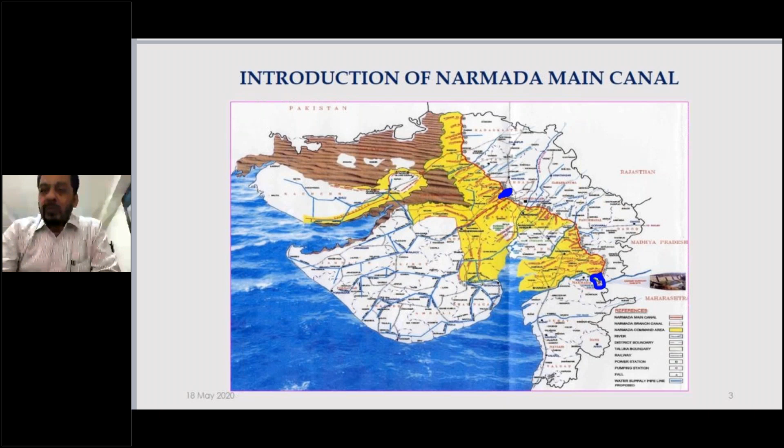Today's case study is at around 70 kilometers chainage of the Narmada main canal, located somewhere here. Looking at the characteristics and salient features, 1133 cubic meters per second discharge is the main point, the off-taking point of the Narmada main canal, which is too big. 1133 cubic meters per second means it is bigger than even a river.

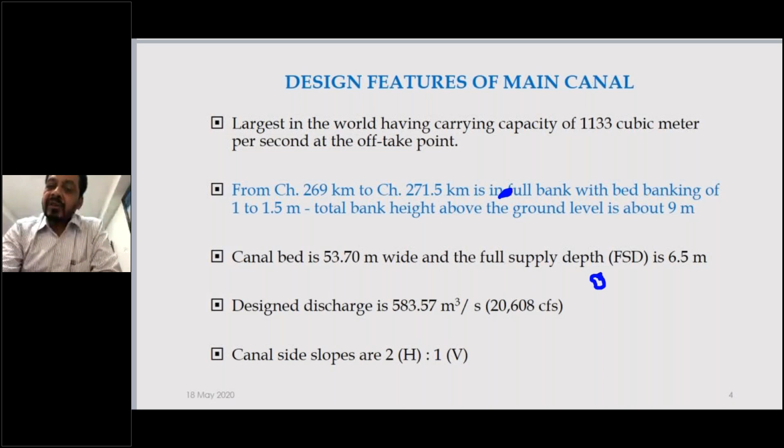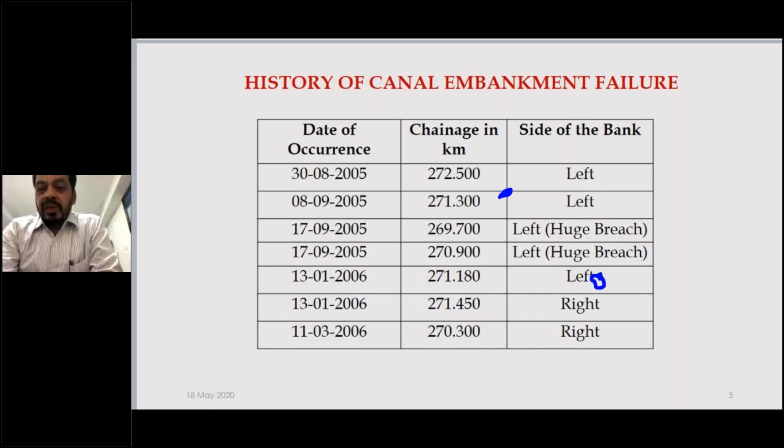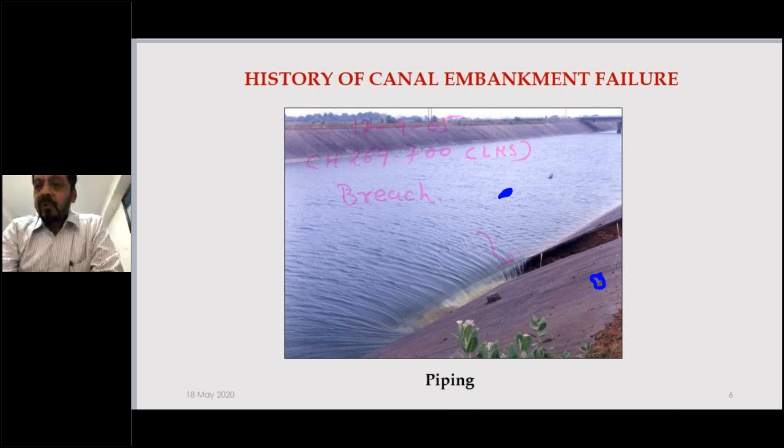What you can see here is a big piping in the left bank of the canal. This piping was 1.5 meters in diameter, just imagine - 9 meters was the total height of the embankment, and 1.5 meters was the size of the piping. You can see in these two photographs the distress this canal caused to surrounding villages. They were all very badly inundated.

This is a photograph of the earthen section of the canal, a far-off view. The section was cut, just like cutting the back of an ice cream, to show how the canal was looking. This photograph shows the signs of distress - a continuous shear failure line here, and here are the structure failures.

With this incomplete line, the shear resistance is too low - that's why this is possible. But you also see a vertical rupture in the concrete lining. Why did it happen? Because some portion subsided and some portion did not subside as much - this is differential subsidence causing this kind of vertical crack. The size of this crack was so big because the subsidence was also so large. This was the failure, as seen in this photograph.

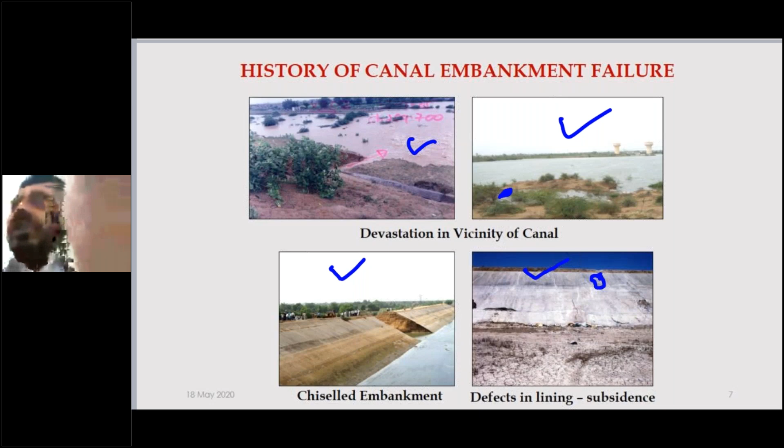So what you see here is a very close view of the chiseled section of the main canal. It is 9 meters tall. You can visibly see 3 flaws in the construction. Flaw number 1 is the stratified section of the entire embankment - some portion is dark and some portion is light. The thin dark portion represents a compacted layer, and the light thick layer represents an uncompacted or semi-compacted portion.

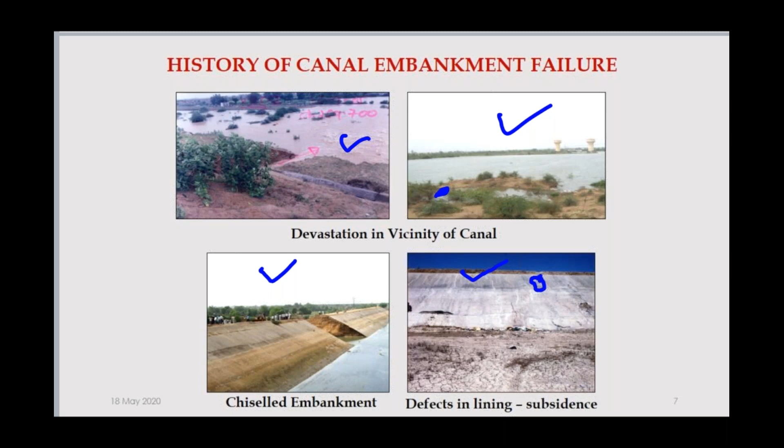Normally we have to construct any canal embankment in a very systematic manner. We prefer to spread only a 23 centimeter thick soil layer uncompacted, then water it, then roll it down to be compacted, going layer by layer. Instead, here there were thick soil layers spread 1.25 to 1.5 meters thick, and then they were watered and rolled. That's why you see the thin line of compacted portion, and the thick line beneath it is the uncompacted or semi-compacted portion.

So that is flaw number one. Flaw number two: actually in big embankments like these, we have to design like an earthen dam. So there would be an impervious core, chimney filter, horizontal filter - every kind of pore pressure releasing mechanism must be there inside. But here it was nowhere. That is flaw number two.

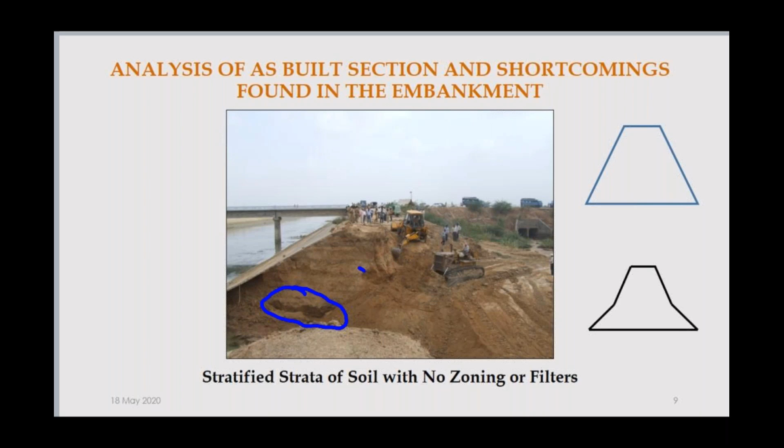And flaw number three, what you can see here, is piping. This piping occurred before the failure, and you can see it's a through piping. And the size of the pipe is also too big. So these are the three failures that were noticeable when we inspected the site soon after the breach occurred.

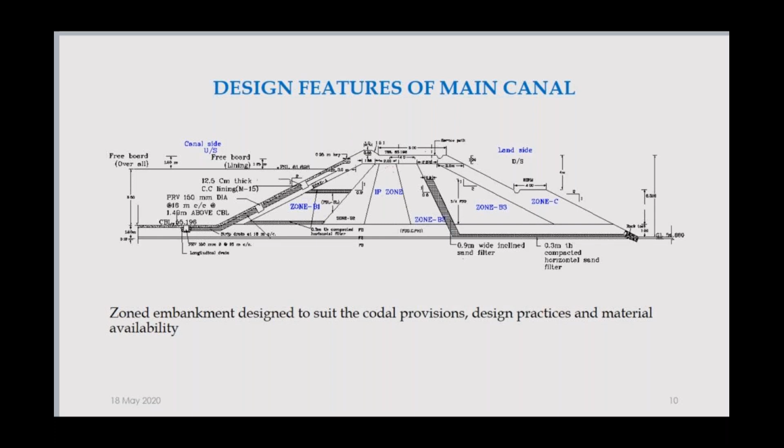So the design section, if you see, is having all the features that I narrated before. Impervious core is also there, then chimney filter, horizontal filter - all kinds of pore pressure releasing mechanisms are there, so that the phreatic line could be within the base width of the canal section. But actually it was not constructed like that.

Now I'm not taking you to the dismal part of the inquiry. Only technical aspects are being focused over here, because our objective is to learn as to how the thing should be better. Now, the question was of analysis of the as-built section - whether it is technically possible to be made feasible to stand for a long time. That was the main question.

So the slip circle modeling that we engineers normally use for embankment stability was not applicable here. Why? Because the fundamental assumption in the slip circle method is that the section should be either homogeneous or properly zoned, so that the properties can be attributed accordingly in the slip circle modeling. But here, because it was stratified, and irregularly stratified, the as-built section could not be properly modeled with the slip circle model. So that was issue number one.

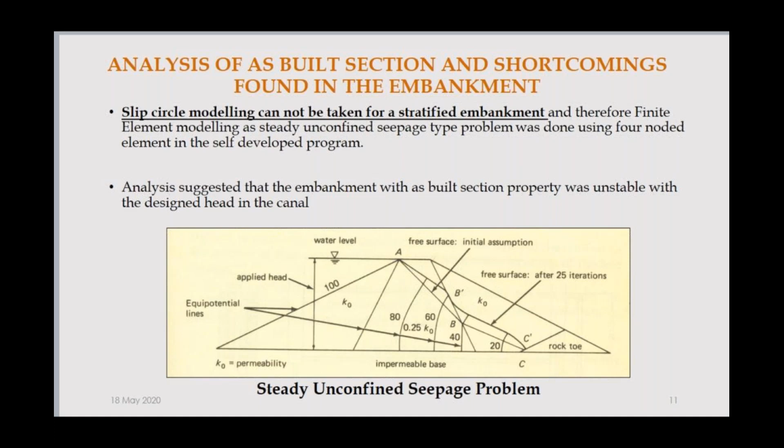But one thing was very clear - that it was actually a steady state seepage problem, and that's why we modeled it like this. In the finite element analysis, K1 represents properly densed or compacted layer, and K2 represents poorly compacted soil layer. That is how we concluded that the phreatic line could not be limited within the base width of the embankment, and it was passing through. Because it was passing through, piping used to take place so frequently. That was our conclusion in brief.

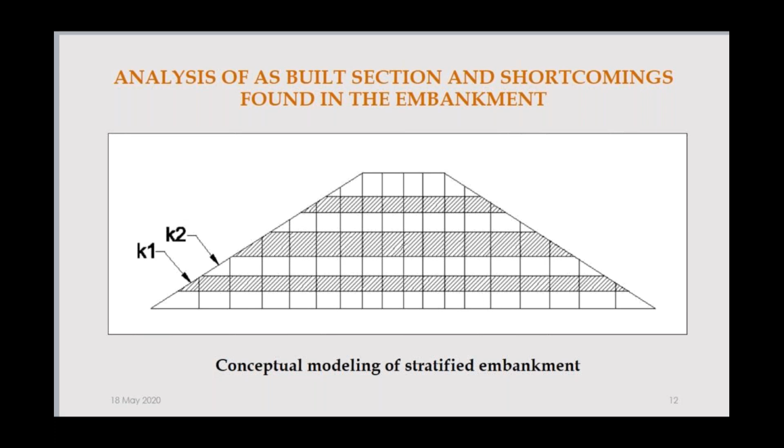Now I am coming to the issues in the restoration of this canal section. This is the main canal of the Sardar Sarovar project, and so many villages and towns are dependent on it for domestic water supply. In order to provide this, the main canal directly supplies the big sumps at town or village cluster level, and only 10 days of standby buffer stock is available for all these towns and villages. So within 10 days, we had to refunctionalize the canal.

That was a big challenge before us - too short a time. Rainfall had already occurred because it was the June end, so all the borrow areas were containing so much water that we could not properly bring soil of the right quality to restore the canal section. Whatever soil was available was predominantly sand with some small quantity of clay inside, so the soil quality available was extremely poor.

So the zonation and the filter material and everything could not be provided because of this non-availability of appropriate material. Another issue was that the length of restoration was too small. The breach was 35 meters, so maximum you can cut both sides, say 15 or 20 meters, and you can have hardly 70 to 80 meters long canal embankment to be restored.

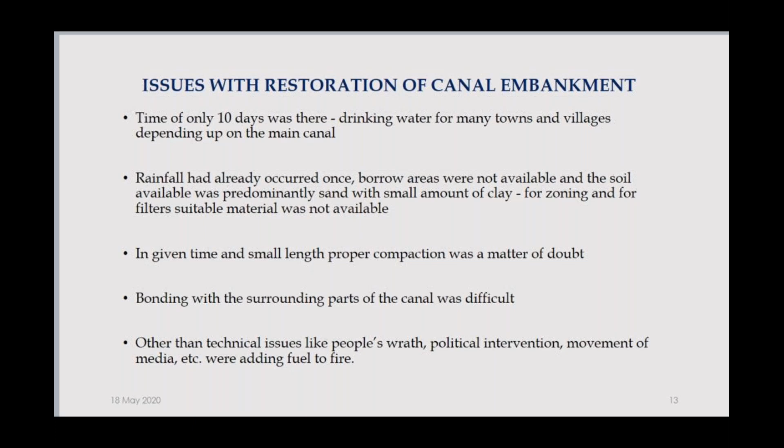That was my first experience. I was not knowing it was going to be a seminal work for my life. But in this first experience, I simply had to depend on the books that I had. There was no IS code shedding any light on this kind of solution.

So I depended on the books only. I made the analysis and contacted all the geosynthetic manufacturers. One had a warehouse in Ahmedabad, 70 kilometers away from this site, and he gave me the material property. It was very cheap on the site, and this material's properties I have listed over here on the screen.

As such, this material was not truly ideal for this kind of solution, but it was still acceptable because of two crucial properties. One is the elongation - just 15% elongation. It was non-woven polypropylene, 15% elongation at the highest tensile strength, which is a very good property that way, meaning my restored portion would not undergo too much deformation. That was my consideration at that point of time.

Number two, the flow rate - you see here it is 260 liters per minute per meter square. These two properties were very much enticing to me, and that's why I said yes, if this material is readily available to me, I will take it instantaneously.

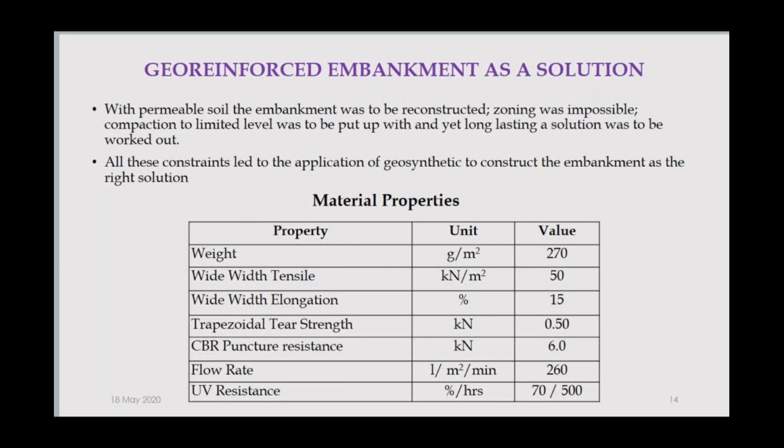But basically my philosophy was that the entire embankment was not geo-reinforced - only a part of it was geo-reinforced, and that was only the outer side. This outer side would be acting as a retaining wall, while the water side would simply be resting on this. So this is how this design philosophy works, and accordingly I designed the section.

Now I'm taking you to the design philosophy as to how the reinforced earth actually works. I'm taking you to the fundamentals because you are all engineers and can appreciate how the reinforced earth works, and that principle holds good in all cases of reinforced earth, whether it is a hydraulic application, a road application, or another application.

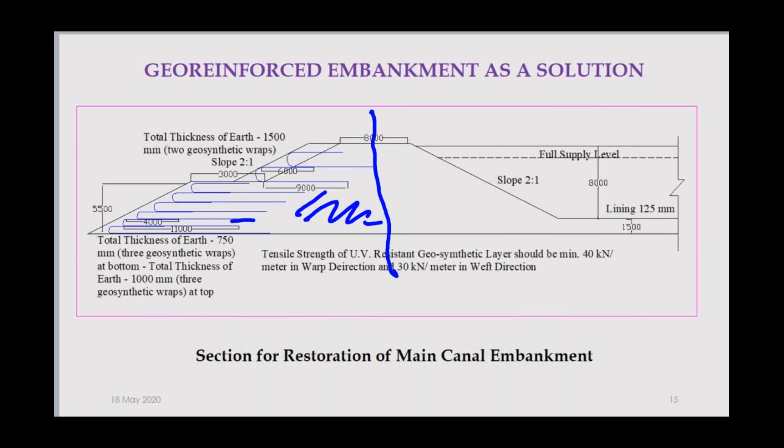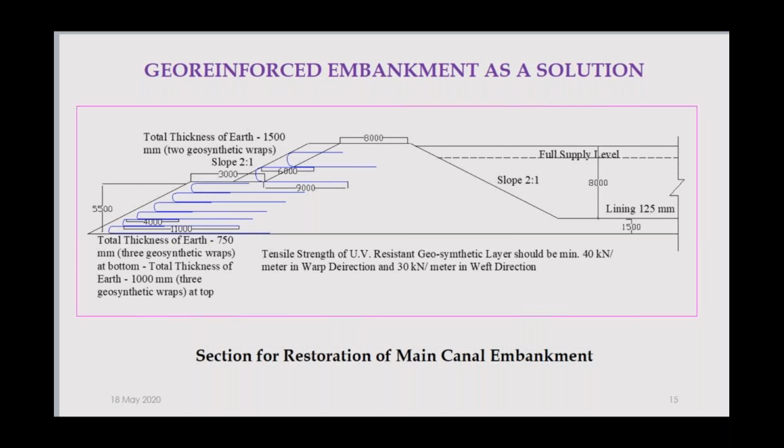So what we do is cut the canal embankment on both sides in steps. The size of the step was exactly as per the location of the geosynthetic sheet we wanted to spread, so every tread of the step would bear one geosynthetic layer. That is how on both sides we designed the entire bonding of the new construction with the old construction.

And this was entirely designed by me single-handedly, because no engineer in my office was ready to take up this design or accept it, saying that with no government IS code and no schedule of rate, how could they sign the document? So on the design drawing, the design carried out by me, it was signed.

The design was signed by me. The design accepted from the construction point of view was also signed by me as the construction wing, or the execution wing. So this kind of risk teaches you a lot, gives you a courage that will be an asset to you for a lifetime. So this is how the bonding issue was resolved.

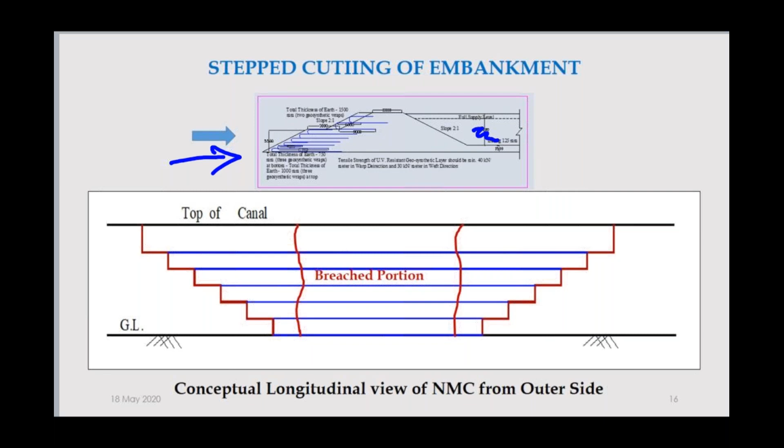Now I'm taking you to the design philosophy. Let us remember the initial days of the 20th century, when these kind of ladder walls were constructed. Even prior to that, so many ladder walls have been constructed in India and China, but they were not officially put before the scientific or engineering community as a technically convincing proposition. It was always put forth intuitively. India is not a country of logic or scientific narration, and that's why intuition is developed in every Indian mind.

But these kinds of walls were nicely constructed and narrated as to how they behave by Andre Coyne, a French engineer. This is his ladder wall, and this is also his ladder wall. He constructed them in 1926 and got a patent in 1929 on this.

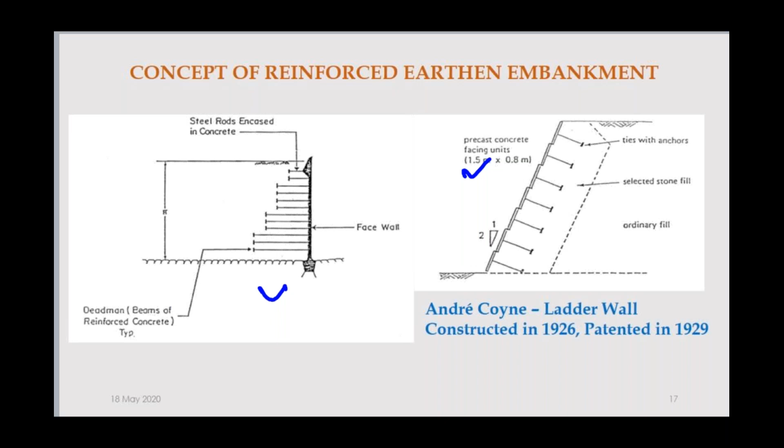How he narrated it scientifically, let us go as per his version. I'm simply reiterating what he has written. His writings are paraphrased in a very prominent book, Earth Reinforcement and Soil Structures, published by the ASCE Press, and it is a very good book. If you encounter this book, please keep it in your personal library as well. That is my recommendation.

So here he gave an analogy of a Howe beam. We all use the Howe beam for medium span bridges and medium span trusses as well. This Howe beam is actually attributed to an American architect, William Howe, who worked on this beam in the first half of the 19th century. Andre Coyne took this Howe beam as an analogy.

If you see this Howe beam, it has this bottom flange, which is actually a tension member. This is the top flange, which is actually a compression member. All these vertical ties are again tension members, and all these diagonals are the compression members in the Howe structure.

If it is subjected to a symmetrical load, these reaction moments will also be symmetrical, obviously, and the deflected shape in general will be looking like this. Now, instead of subjecting it to a uniformly distributed load, you can subject it to a uniformly tapered load as well. Only the behavior of all the members will be changed. How they change, that we are discussing.

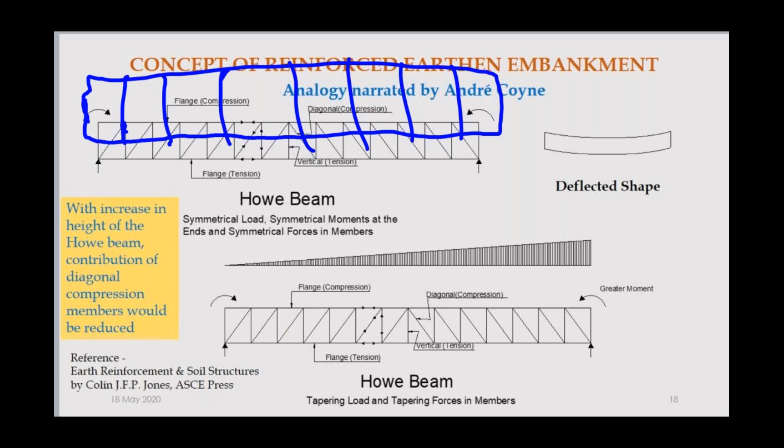Now let us consider a Howe beam subjected to a tapering load like this. In the tapering load, the behavior will change only in one aspect—the compression and tension will remain as it is. So the bottom flange will be in tension, compression will be there in the top flange, the vertical ties will also be tension members, and the diagonals will be the compression.

But as you see on the right side, that is the increasing load, and the moment will be much greater—the reactive moment will be much greater. One more change will also be there from a structural analysis point of view: as you travel in the direction of increase in the load, you will see that the contribution, or forces in the elements, are also increasing in magnitude. The nature will be the same, compression or tension, but the diagonals will be carrying more and more compression as you travel towards the direction of increasing load. And that is how the behavior is changing.

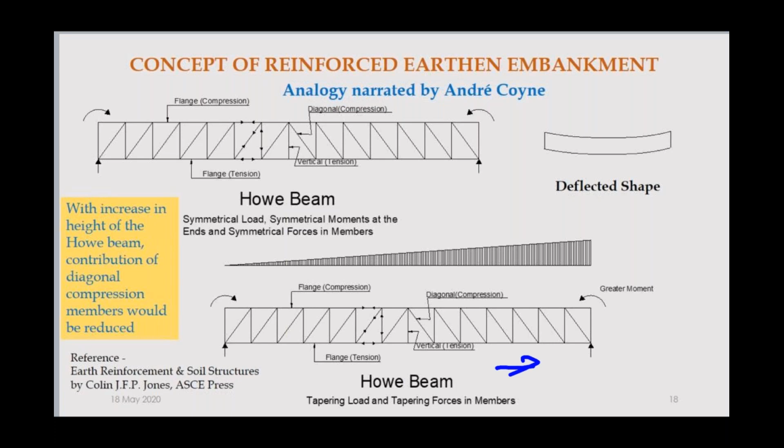Let us now understand how we use the analogy of the Howe beam in our retaining wall kind of mechanism. This is the typical retaining wall that we construct, and the deflected shape is what I have shown in magenta.

The tension in this is on the inner side, that is the backfill side, and the compression will be on the outer side.

If you rotate this Howe beam by 90 degrees anti-clockwise, you will see the Howe beam looking like this. We are taking only a part of the Howe beam, not the entire beam. This inner flange will be taking the tension, as we have seen in the cantilever wall, so this will be the bottom flange. This outer side will be taking the compression, so this will be the top flange.

The ties are now becoming horizontal because we have rotated it 90 degrees, and the diagonals are still taking compression, as we have understood.

Now in the soil, as you go to the bottom, the self weight is increasing. As you go to the bottom, the weight of the soil will obviously be increasing, and the same will be the phenomenon in the lateral thrust. As you go to the bottom, the lateral thrust will also increase, and that is a linear increase.

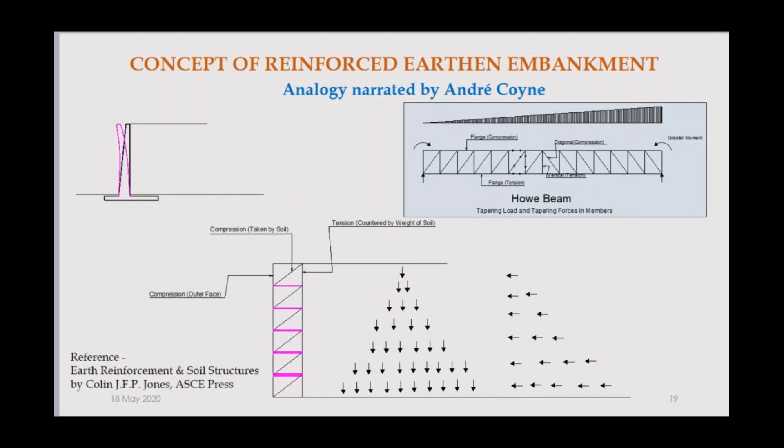So with this understanding, how the wall should behave - this is the geo-reinforced earth wall, a typical section. All this is banking on this red outline box, or now I am making it blue. This is the geo-reinforced earth wall, and these are all the geo-reinforcements.

Now, how does it behave? This entire area is the compression zone. As it is here in this case, this portion is the tension, but here the weight of the soil is increasing as you go down, and the weight is so much that it counters the tension requirement of the bottom flange of the Howe beam. So you are not providing any tension vertically, because the soil weight itself is sufficient to take care of it. Now this is the compression zone.

In the compression zone, the compression is significant, and that's why the soil gets ruptured at times. In order to avoid the rupture, how do we take care? We provide the outer cladding like this. These are the outer claddings, and they are properly tied with these reinforcements, so this compression zone is actually a confined zone.

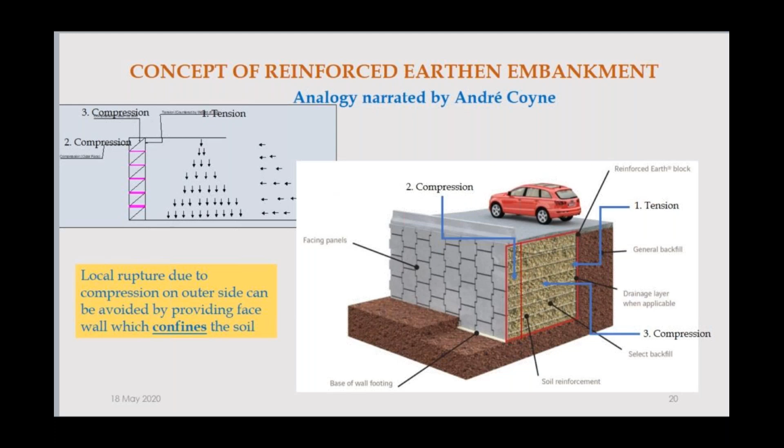Now let us come to my section. Here what you see is, in the bottom, the spacing of the reinforcement is very low. As I go towards top, the spacing between the layers increases.

Why does it happen so? The reason being, the ties, as you go to the bottom, the force is more, and that's why the tension should also be more. Now, I cannot increase the stiffness of the geosynthetic material. Had it been a case of steel structure, it would be all right, but here it can't be.

So instead of providing thicker material at the bottom and keeping the spacing as it is, I have reduced the spacing, keeping the geosynthetic material as it is, and that is how the variation of this strength has been taken care of. Because you are engineers, you can understand it easily. Reduce the spacing instead of increasing the thickness of the element, and that is how it is.

Now you see here the embedded length at the bottom is more than the embedded length at the top. Why is it so? Let us remember the contribution of Henri Vidal, again a French engineer who worked in the second half of the 20th century. Because Andre Coyne has constructed so many retaining walls like this, ladder walls, Henry Vidal extended this work.

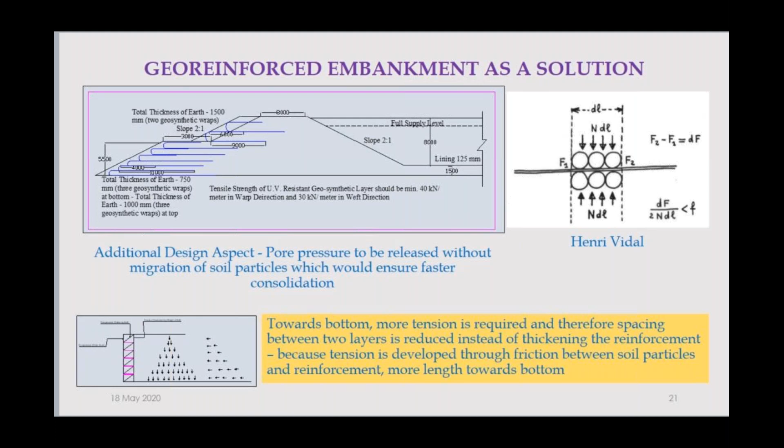So now, this is the design philosophy of my reinforced earth wall over here. I have got all the calculations manually done that I can share, but here the time is too short. I'm not narrating step by step, but this is how it works so well.

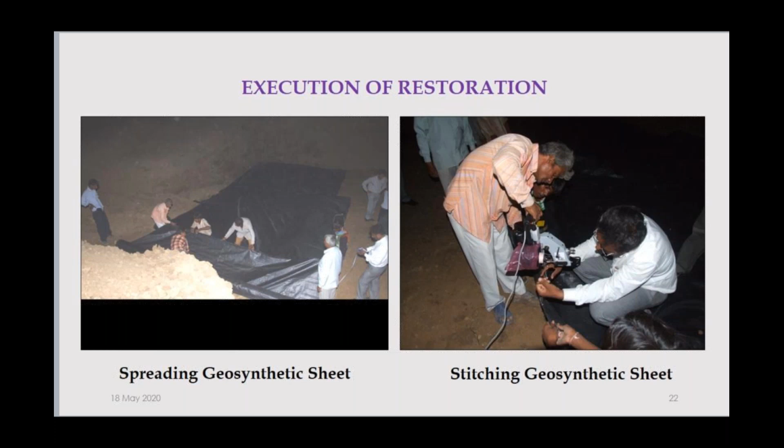These are the sweet memories of our working day and night on the site. These are the stitching experts with handy machines, and they are joining one sheet with another. I got the rolls of 6 meters each.

Now this is the completed section. Only thing you know is that I did this reinforced concrete lining. This much portion was the reinforced concrete lining and not the plain concrete lining. And on the outer side, we have sown some seeds of vegetation, so that self-stabilization of the earth will also take place on the outer side, and the geosynthetic material is also duly covered.

Now there will be a fundamental question: if there is no chimney drain, how will the pore pressure be controlled in this section? That is required to be answered by me prior to you asking me. In this case, as the material is sandy with only a little amount of clay, the material is too porous. Truly speaking, the material is too porous. I showed you the second property of the geosynthetic material, that is 260 liters per meter square per minute, that is the filtration rate.

That is the filtration rate. So whatever pore pressure is mounting in my embankment is actually released through the apertures of the geosynthetic sheet. 260 liters per minute per meter square is too good a rate. So the pore pressure, as soon as it's developed, is allowed to be released, without allowing any kind of particle migration because the apertures were too small. So this is how the pore pressure is duly taken care of, and the entire section behaves very nicely.

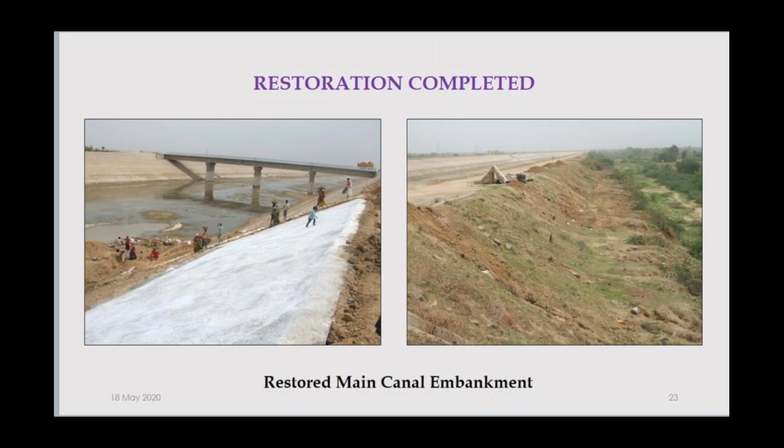Now I'm taking you to case study number 2. It is actually addressing the seepage and stability challenges in canals with sandy soil. Here I am taking you to the case study of a new construction of the canal, fresh construction, not the restoration I discussed earlier. Here in the Sardar Sarovar's command area, this last portion of the Gujarat reach, very close to the desert of Kutch, as you can see, this is actually the commencement of the small desert of Kutch.

So all the soil is sandy. It is all sand, and that too SM kind of - very fine sand, you can't compact it. And last 4 canals are there to be constructed in this region. If I try to borrow some good soil, that will be some 200 kilometer of lead, and transportation cost was coming to the tune of 1800 rupees per cubic meter. Just imagine, 1800 rupees per cubic meter. Instead thereof, I can construct the entire canal of concrete solid monolith. That will be cheaper, you can understand this.

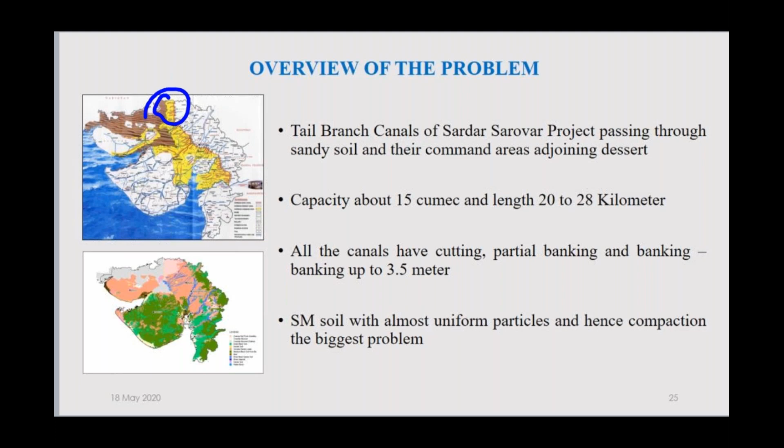So there was no conventional technology to come to my work. Here you can see all the sandy soils are there, but anyway there was no option. So I thought, here also geosynthetic will come to my help. The main issue here was compactability was nowhere - SM soil, all particles are fine sand, uniform size, so you can't compact them. If there is variable size of particle, then only can you compact it. So compactability was an issue. Permeability was another issue, because so many voids were there in the SM kind of soil.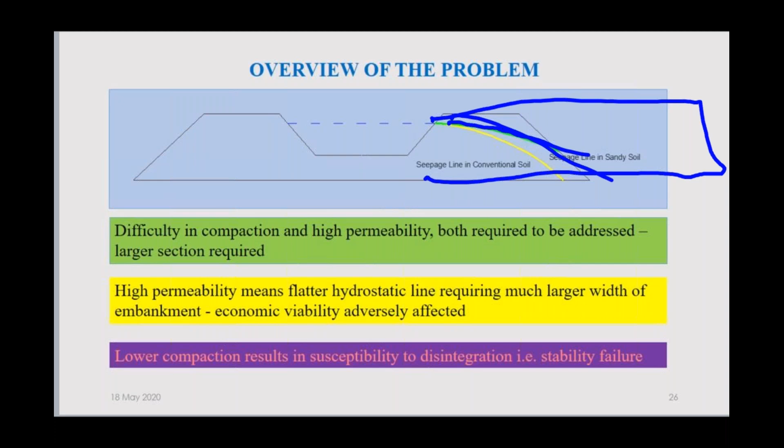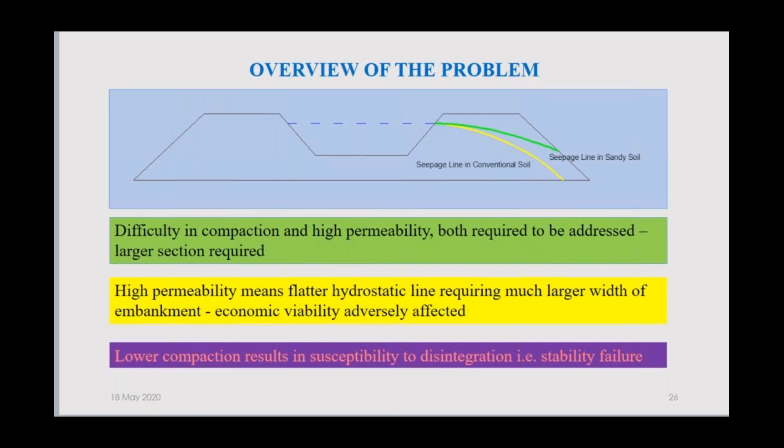So instead thereof, we thought we should go for a geo-reinforced section. Another issue with the SM soil was spreading kind of failure. If the SM soil is there, the pore pressure variation because of the water level variation - water level will be having different heights. In the daytime we shall increase the discharge, in the night time we shall reduce the discharge. So because of the variation in water levels, the pore pressure will also vary inside the embankment, and that pore pressure variation can also lead to a spread kind of failure if the canal is made up of SM kind of soil.

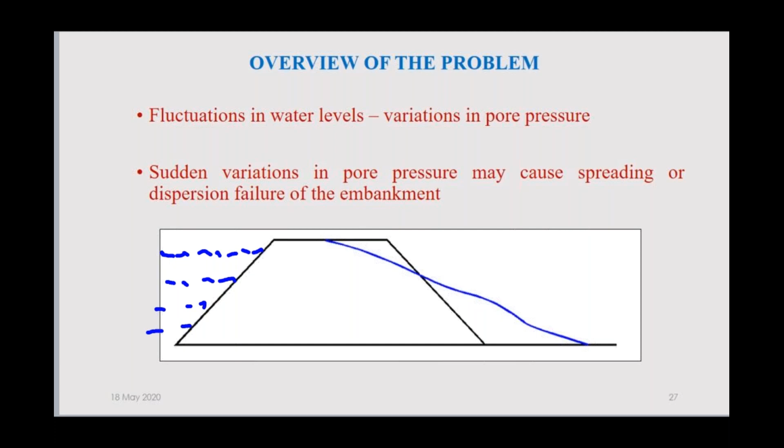So how to address all these issues? How to grip this soil? So again, the geo-reinforced earthen section was thought of. Some people were recommending the CNS soil layer like this, but how to compact this layer in so short a bit? And again, the CNS material was required to be brought from 200 kilometer lead. So instead of going for conventional solution, I recommended we should go for this kind of reinforced earthen embankment.

So these are the geogrids that we preferred instead of polypropylene. Here are the geogrids that we have preferred. This one is the geosynthetic clay liner beneath the lining, and on the geosynthetic clay liner we have used 0.5 mm HDPE sheet, and above it we have provided the concrete lining. So this is how conceptually it was.

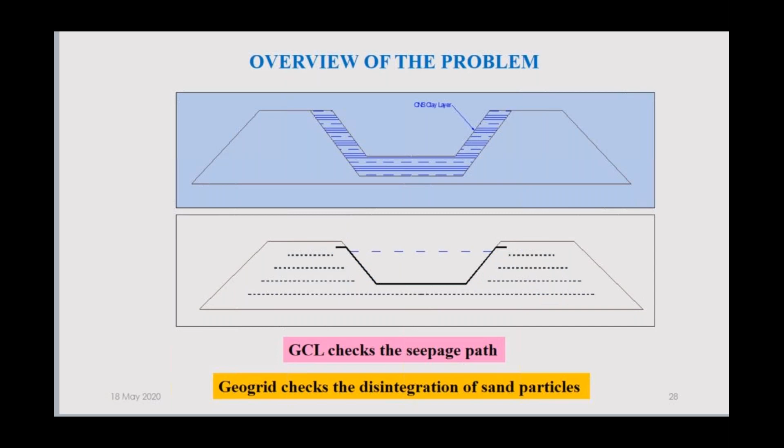Geosynthetic clay liner, what it is, I'm just giving you a glimpse of. Actually, geosynthetic clay liner is a sandwich material. There are two sheets, they are permeable sheets, and here what is filled is the bentonite clay. It is pure bentonite. So as soon as the material comes into contact with water, the porous covering of it will allow the water to go inside, and as soon as the bentonite comes into contact with the water, it swells. And because it swells, it becomes impermeable. Its volume increases, all the voids are filled, and that is how it becomes an impervious layer. So many applications of geosynthetic clay liner is done in mining applications.

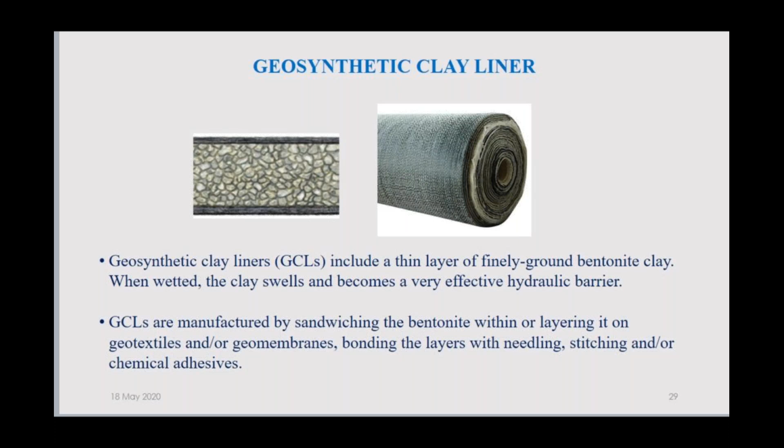These are the properties of the geogrid that we have used as reinforcement. You can see here the tensile strength is reasonably good - 60 kilonewton per meter means the geogrid is very good. Albeit it was not a biaxial geogrid, it was a uniaxial geogrid, and that's why in the cross direction you see here it is only 20 kilonewton per meter the strength. So it is a uniaxial geogrid that we have preferred because our application is uniaxial - only the transverse direction of the canal will require tension, not the longitudinal, and that's why it is this kind of property.

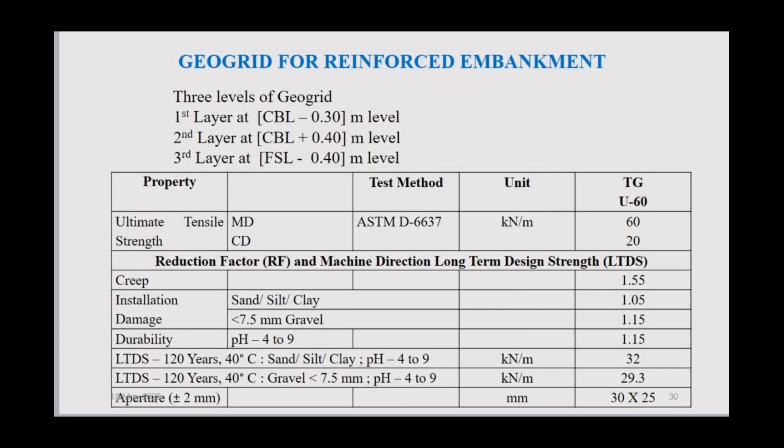Now the lining was difficult because here the tender condition provided for mechanical lining. Now the mechanical lining has a blade, so that when the lining machine moves, the blade will first correct the profile of the subgrade and the concreting will be applied on it. But here, if the blade is allowed, then my geosynthetic sheet will be cut. So we had to do some mechanical engineering on the site itself. So we removed the blade of the machine - one machine was kept with the blade and the other machine was kept without blade.

So one machine was allowed to move with the blade so that the subgrade was prepared. Then that machine was taken forward, followed by the machine without blade. Now the machine without blade, instead of taking a complete trapezium section to be lined, it took it in pieces. This is the first piece that we did.

One track was put over here, other track was put over here, and this much portion was lined. Then we took this machine forward in the next reach, say 100 meters, and then we reversed this machine and put it like this, so that the first 100 meter lining was up to this, and the next 100 meter was this. So the bottom construction joint was staggered. I think you got what I wanted to communicate.

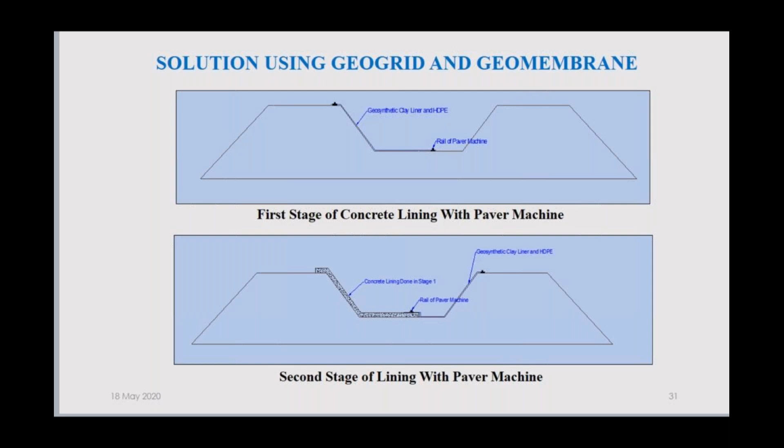So this is the first stage and this is the second stage. In the second stage, on the first half when the lining was done, the second part of the lining was done like this. And that is how, in a staggered fashion, we constructed the bottom joint in order to avoid differential settlement induced shear failure in the bottom of the lining. So this is how the construction was done.

This is the geosynthetic clay liner, and this is the machine working in only half of the trapezium, which you can see here in this photograph. Okay, so now the canal that was made was looking like this.

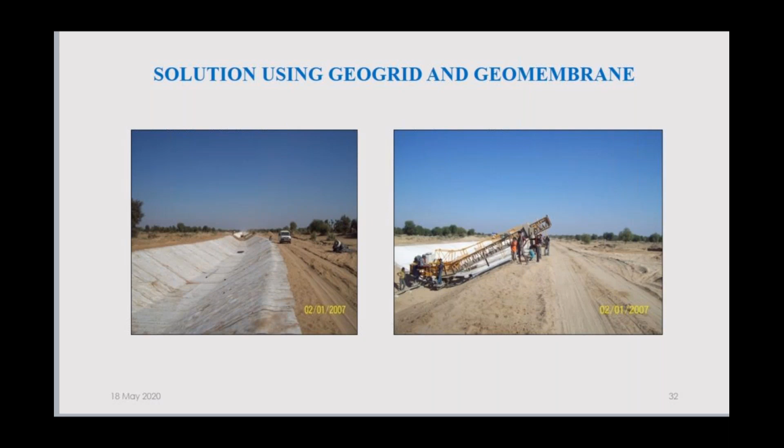One very good experience that we encountered after construction of the canal: this construction was done by me in 2013. In 2015, there was an extraordinary monsoon, though it was an area nearing the desert. Night long, it was high intensity rainfall.

The canal got submerged for a day, and then the water was released. Because it is stable and the drainage is also very poor, it took some long time to drain off. But still, in one day, the water receded and the canal was open. We inspected it, it was absolutely fine. You know, canals are never designed for submerged conditions, but here, these canals even took the challenges due to submergence.

Then in 2017, it was a worse monsoon. All the rainfall occurred over here as if the cloud burst. You won't believe, 34 inches of rainfall occurred in 24 hours in this region. The entire region was inundated. Narmada main canal sustained damage that required restoration of 700 crores of rupees. Just imagine what would have been the situation of the main canal.

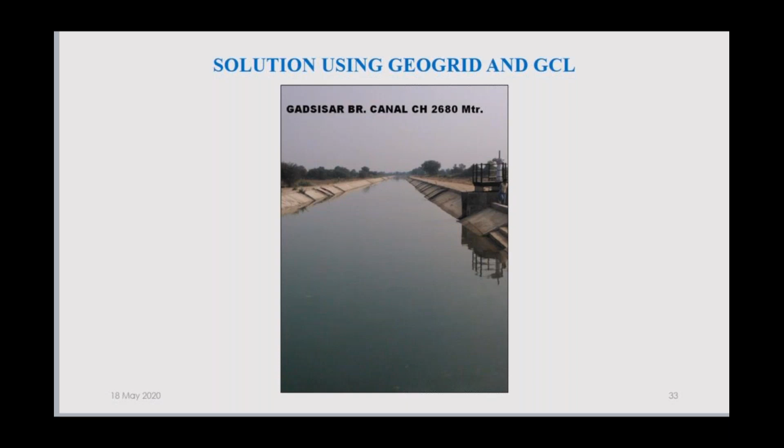But these two canals that I constructed with geo reinforcement remained submerged for 3 days, and water receded after 5 days of time. And still, this canal demanded not even a single rupee of maintenance. So this is the beauty of the construction of the canal with the geo reinforcement.

Now I'm taking you fast to case number 3. This is actually a divide wall between a dam and a hydropower in the downstream of the dam. You are all aware of the Tapi Basin because we too are sharing the Tapi Basin. We are the tailenders and you receive the maximum catchment of the Tapi. So this is the photograph of the Ukai, and this is the spillover section of the Tapi, what you see on the left photograph. The same spillover section over here is shown here in magenta form, like this.

So this is the spillover section, this is the river gorge. And this small blue line, what you see, is the hydropower tail race. Now, this magenta, what you see, is the divide wall between the two. And this red box that I have shown over here is the nosing of the divide wall. As you know, any kind of divide wall or groin, its most vulnerable part is the nosing.

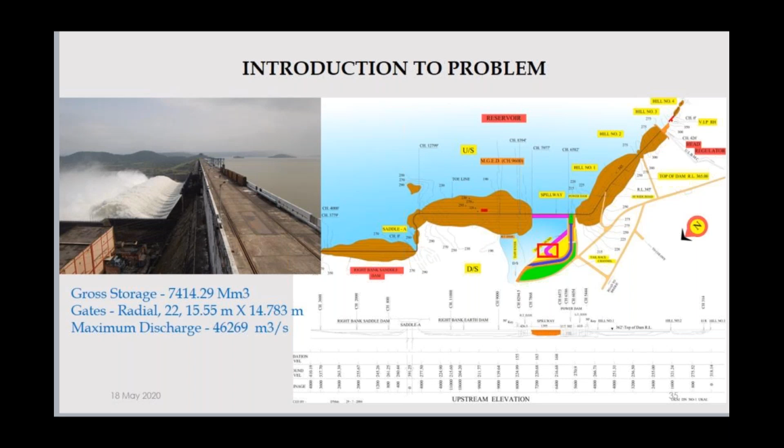So this nosing got very badly damaged over a period of time, because it was taking all the time on its chest, the buffeting of the water. This was the damaged portion of the nosing. You can see it is completely destroyed. And when I visited this dam, it was a pitiable situation.

Now this was the restoration section that I designed. Here, I was actually chief engineer and not the head of the design office, but because my experience in geosynthetics was immense by this time, I gave the design instead of the central design organization. So the design proposed by me was this.

Whatever was the pit in the river bed, that was filled up with this kind of plum concrete. Densely arranged rubbles filled up with the concrete. So this restoration was like this.

The horizontal portion was the Gabion covering of this plum concrete and a cladding of thick reinforced concrete, say 1.5 meter thick.

Now this inclined portion is the most vulnerable part of the entire nosing. How did we do it? We provided a polymer sheet.

Only to transfer uniform load on the earthen embankment, it was covered with a biaxial grid. Mind well, here is a biaxial grid because the application requires biaxial forces to be taken by the geosynthetics.

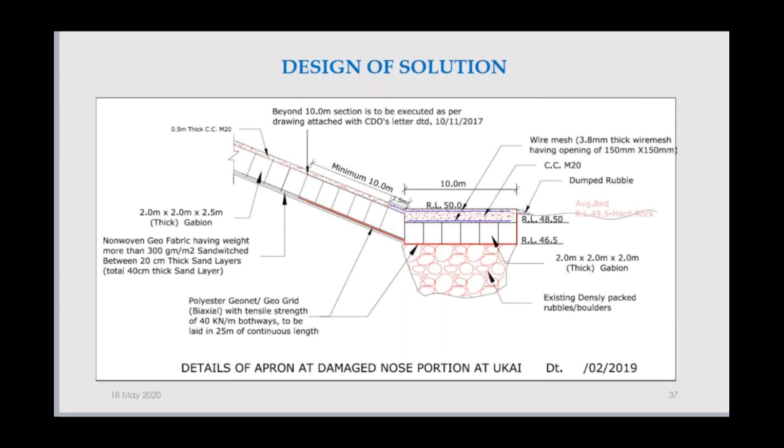And this is the ongoing work. It was not even completed, albeit it had reached the safe stage, and we had to release flood water in the same monsoon 5 times. You can see here the flood water gushing out. 5 times we had to release the flood water from the spillover section, and the nosing is behaving so well. You can see here. Thank you so much.

Just in conclusion, I would say two things. Lessons that I have learned by dealing with geosynthetics are two. Number one, geosynthetic material can provide you idoneous solutions to several challenges related to hydraulic structures.

Number two, this is the fundamental principle of holistic science, which says the whole is more than the sum of all its parts. So when you apply geosynthetic material, you deal with the soil, you deal with the geosynthetic material, but when you make an integration of the two, it becomes more than the sum of the two. Thank you all.

Now I think I should open the session for question and answer.